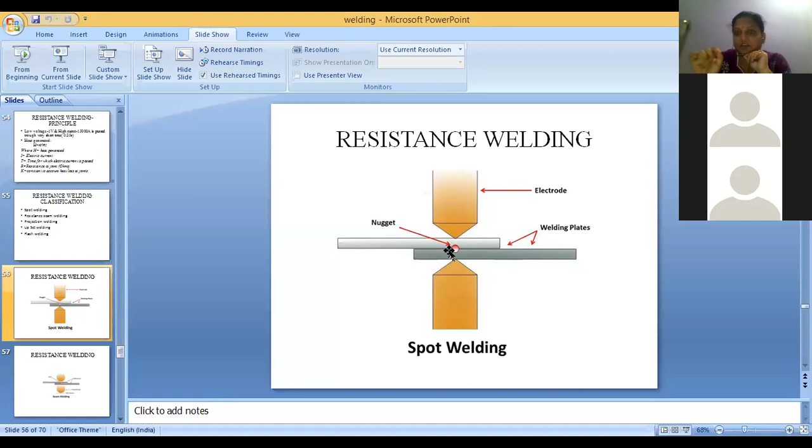Next one is resistance welding. In case of resistance welding, we'll have two electrodes, and when electricity passes, resistance gets created and metal gets melted. This is how the weld forms. In case of spot welding, you can find dots, dots, dots over there.

This is seam welding. In case of seam welding, we'll have two rollers, and these two rollers will roll over the material. The material gets melted at the junction, and it forms a weld. So this is seam welding.

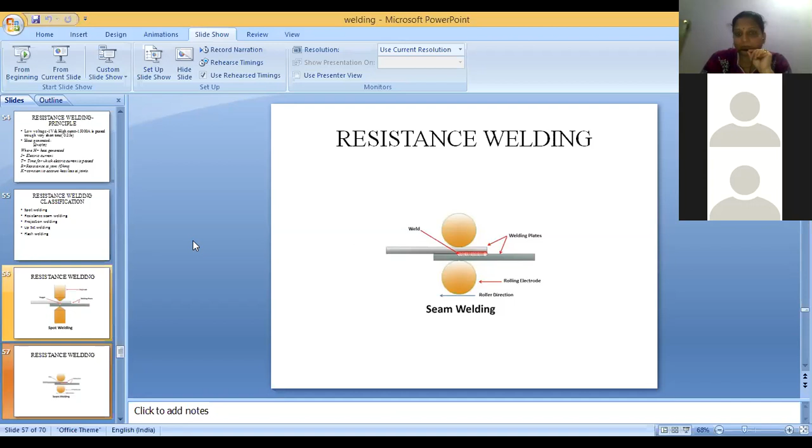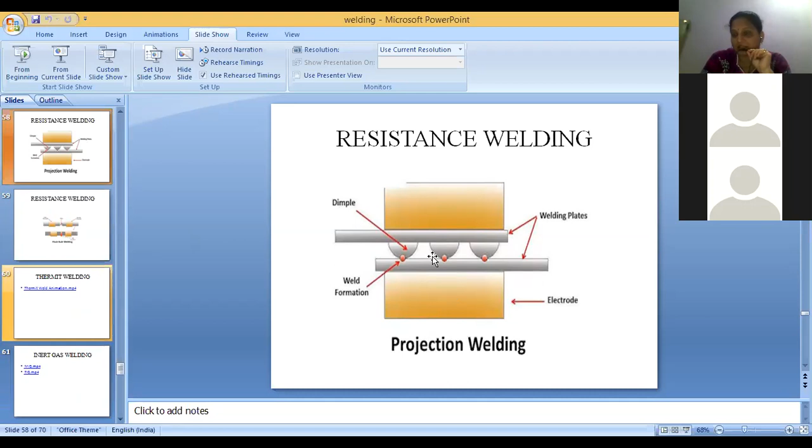Next one is projection welding. In case of projection welding, one of the metals will have dimples, meaning projections like this. The upper and lower yellow color parts you see are the electrode. When electrode passes through, this dimple gets melted and it forms a weld. This is projection welding.

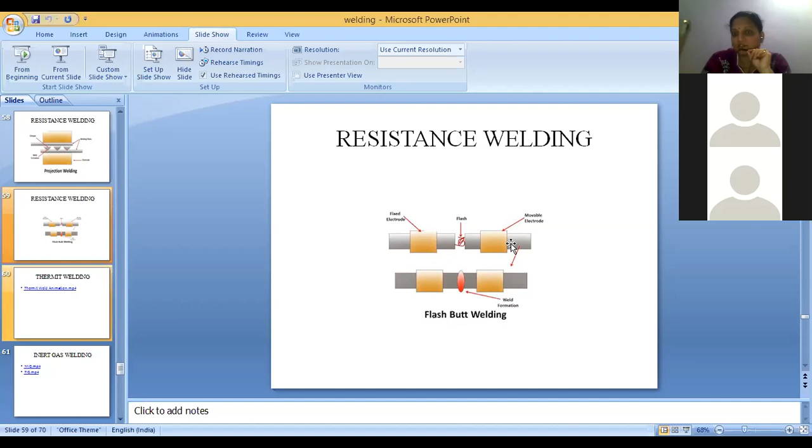This is flash butt welding. In case of flash butt welding, you'll have electrodes - this is fixed electrode and this is movable electrode. An electric arc produces between these two electrodes and these two metals get joined. So this is flash butt welding.

Next one is thermit welding. Thermit welding is used in railways for joining railway tracks. I'll show you a video for this also.

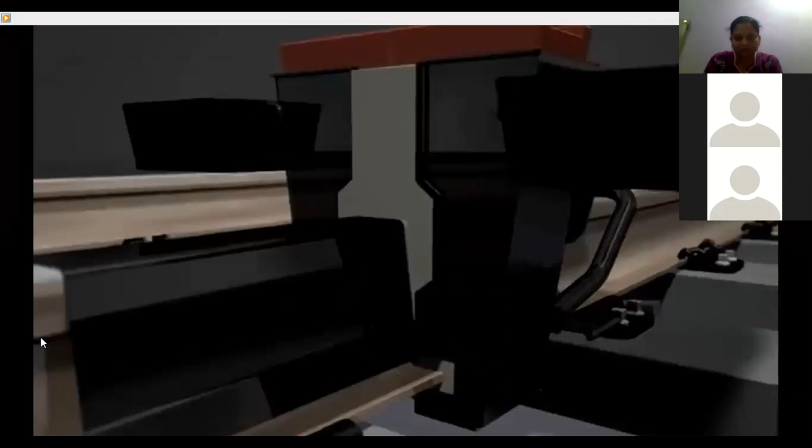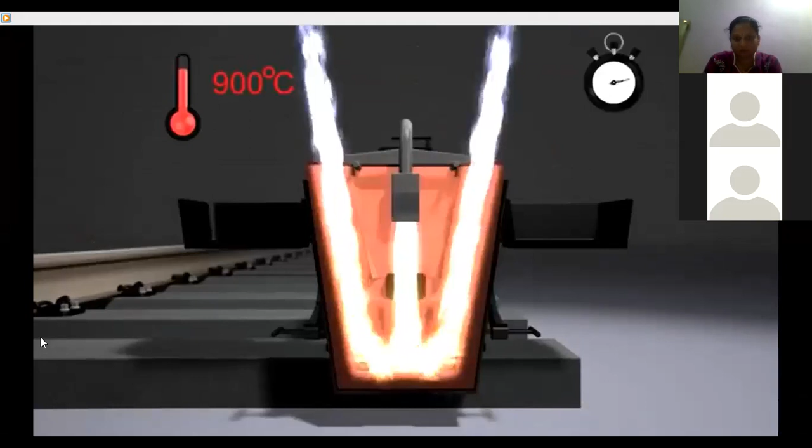So these are the materials which we use. They first mix all these materials and pour them into the setup which they have done.

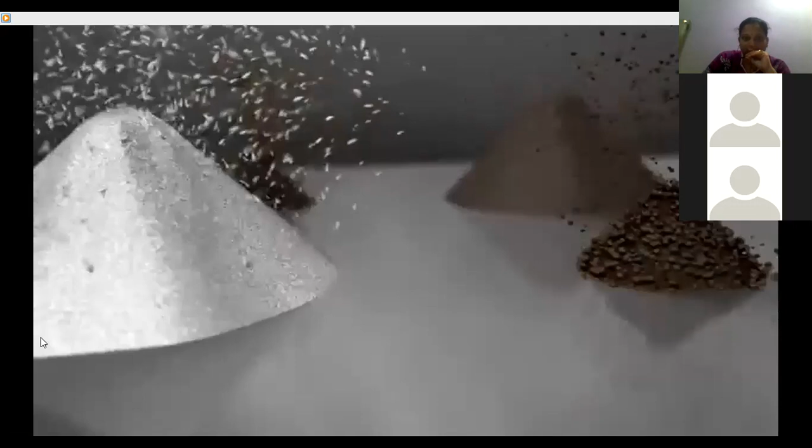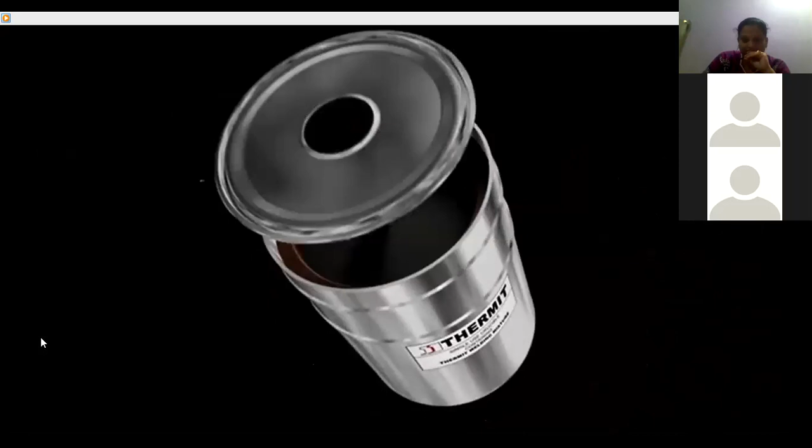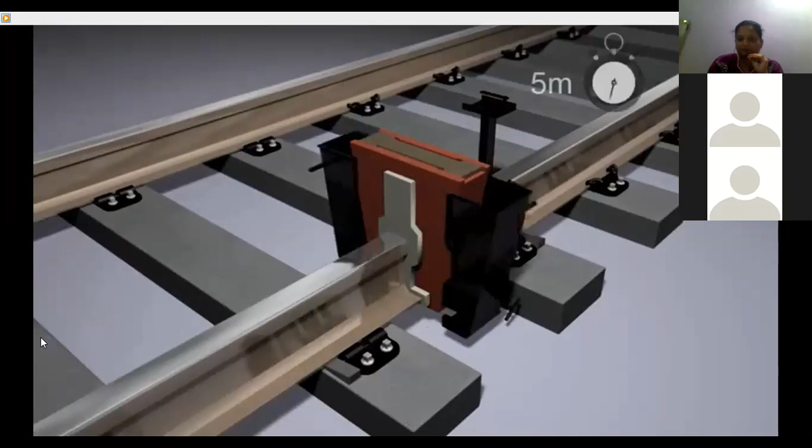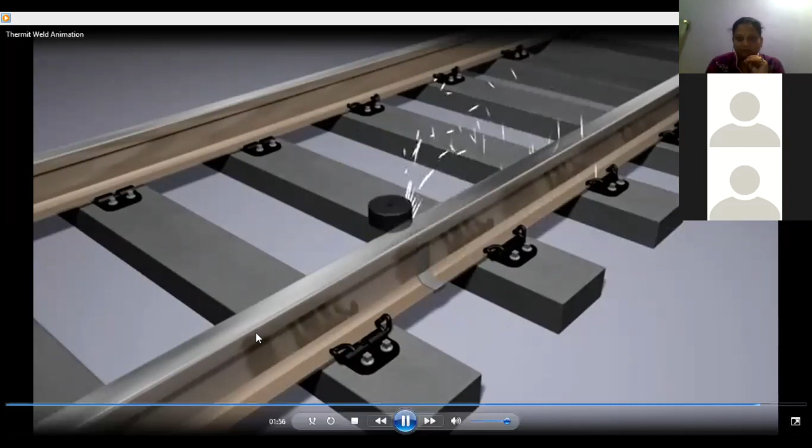See, it is getting heated up there and getting melted. Now the metal is poured. Now welding between both the tracks will take place. After it gets solidified, meaning after it gets cooled, they remove the equipment they have placed, and then using a grinding machine, they grind the extra part. So that is thermit welding.

Next one is explosive welding. In case of explosive welding, we'll have some explosive material which is kept over the workpiece. Can you see the screen?

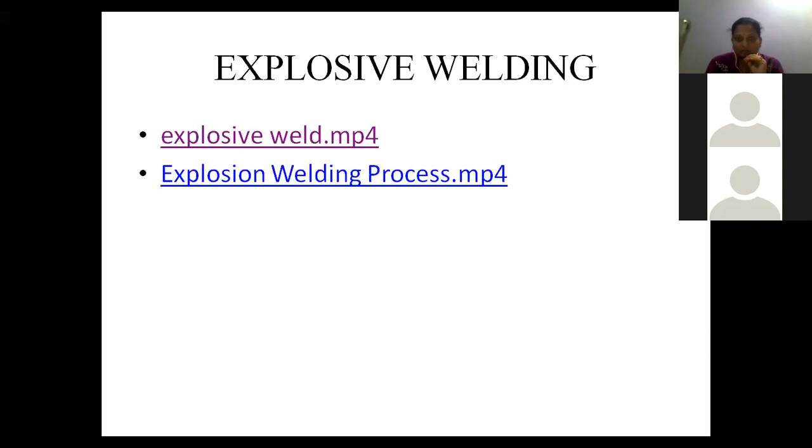Ma'am. See, now, can you see the screen?

See, you have some explosive material kept over this plate. Here you have two plates and explosive material is kept over the plate. When you ignite it, the explosive material will also get ignited. Because of high ignition, the upper plate will be pushed towards the lower plate, and because of that explosive pressure, both the metals get joined. But it is not suitable for doing near our residence - it will take place at areas which are very far from residential areas.

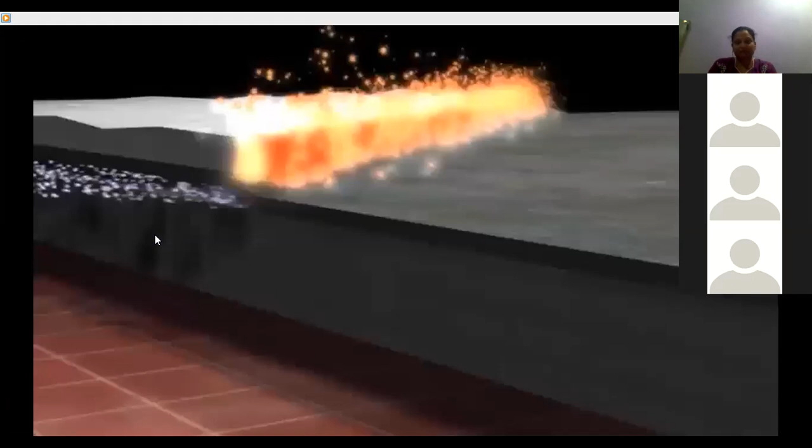Next one is laser welding.

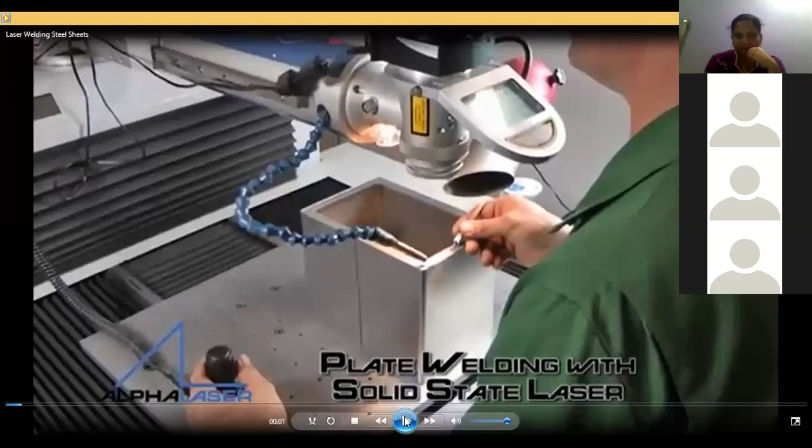See, he is using filler rod - that is filler rod, the wire in his hand.

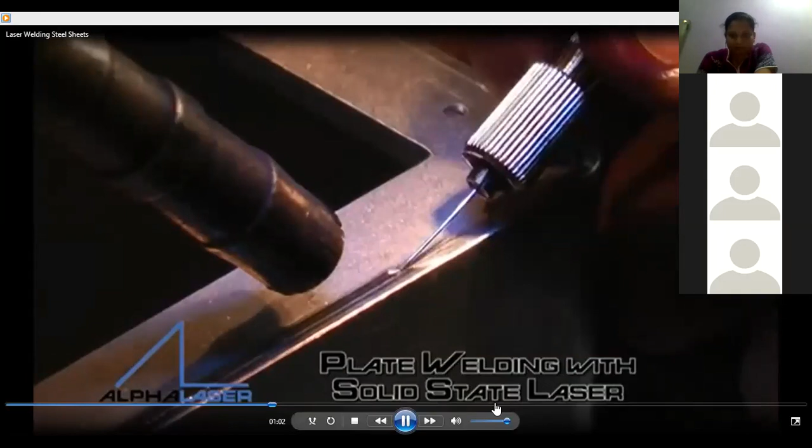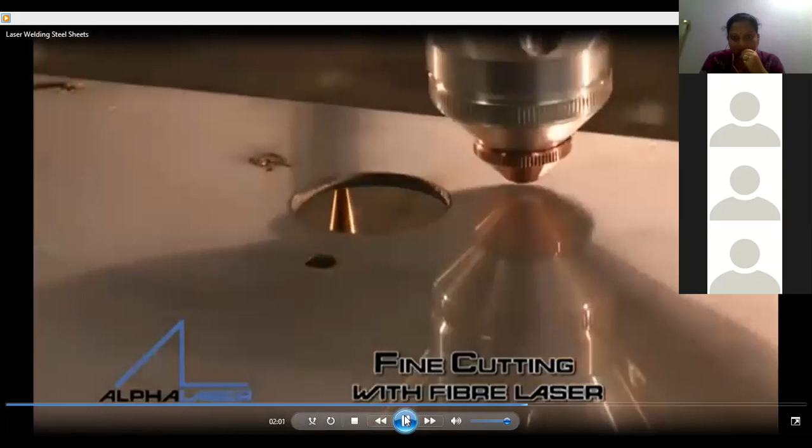See, this is laser cutting. I'll stop sharing here. I'll share something new again. This is laser welding.

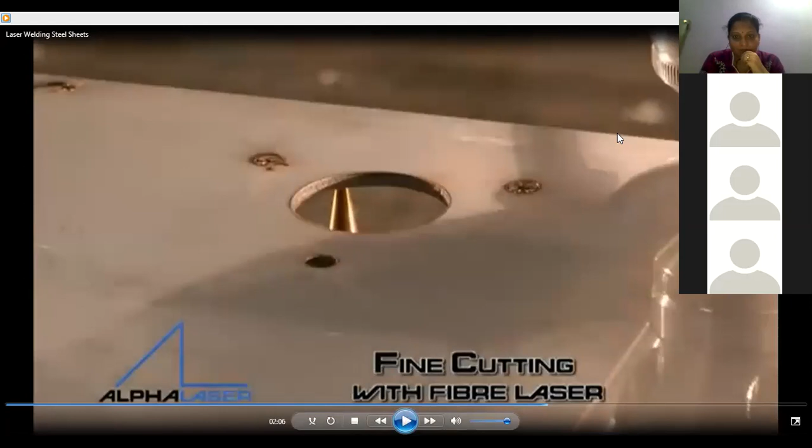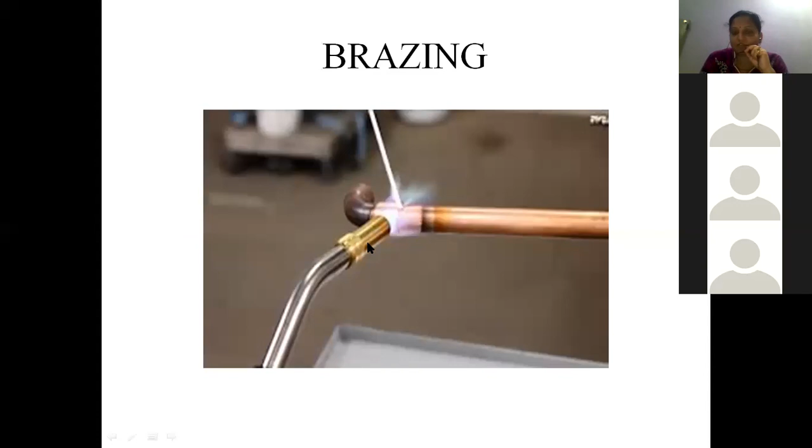This is brazing. Heat affected area is the area which is getting affected by the welding heat. If you're producing arc welding or gas welding, because of the heat produced, some area of the metal gets affected. That area is the heat affected area.

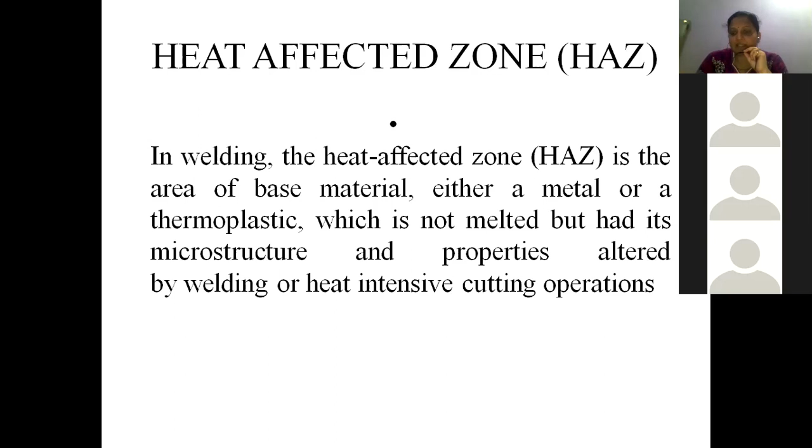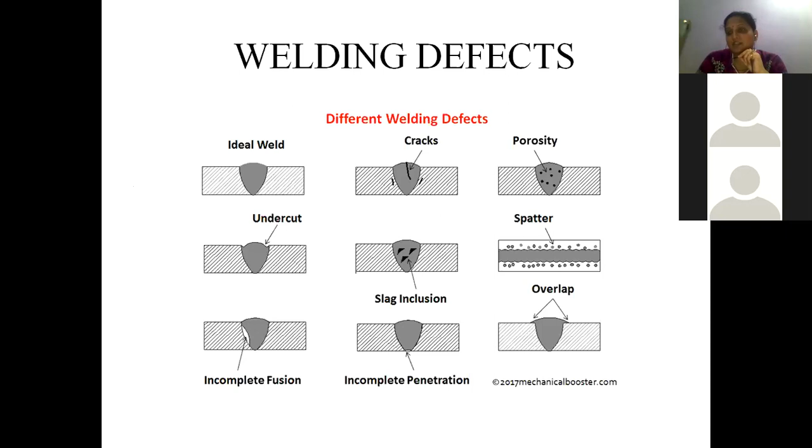Now if you get these defects, we go for inspection. Meaning after performing the welding, we generally go for inspection to test whether we have these defects or not. So we have two types of testing: destructive testing and non-destructive testing.

Destructive testing is where we break the metal and check, meaning strength of the material, hardness, and all we check. By destructing it, meaning by breaking it, that is destructive testing. And in non-destructive testing, we don't break the material - without breaking it, we check it.

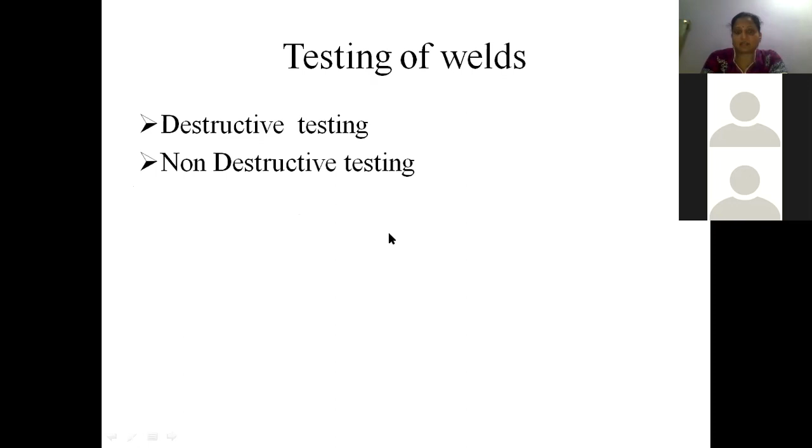Visual inspection is where we see and say whether there is a defect or not. Dimensional inspection is where we check with the equipment. Metrological is where we check whether the composition is right or not using some projectors.

Pressure testing is where we insert some pressure inside and check whether there is some leakage or not. Radiographical test is where we take an X-ray type of thing and check whether there is a defect or not.

Magnetic testing is where we keep the component in a magnetic field and check whether there is any defect or not. Magnetic particle inspection test is where we keep some magnetic particles on the surface and pass some magnetic field, and if there is a defect, all the particles will come and accumulate at the defected area.

Eddy current is by passing current we check whether we get a beep sound or not. Liquid penetration test is where liquid gets penetrated into any surface defects and projects the area. Ultrasonic test also sends ultrasonic rays, and if there is any defect, we get a beep sound.